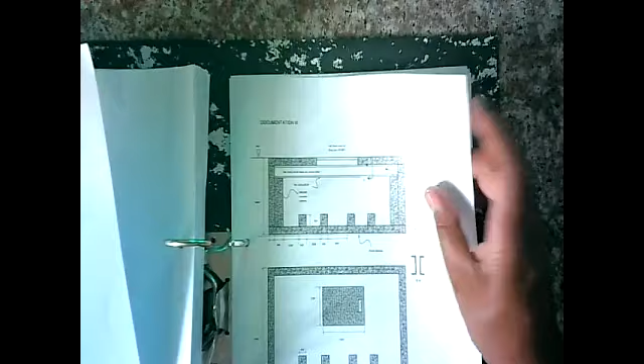All right, page 63, and we're looking at the next question, question 3. And we've got here: the drawing below shows the details of the submerged reinforced concrete pump station. All right, now this particular question was, I suspect, a past year test question. So good practice for you guys for a test. All right, so let's look at question 4.

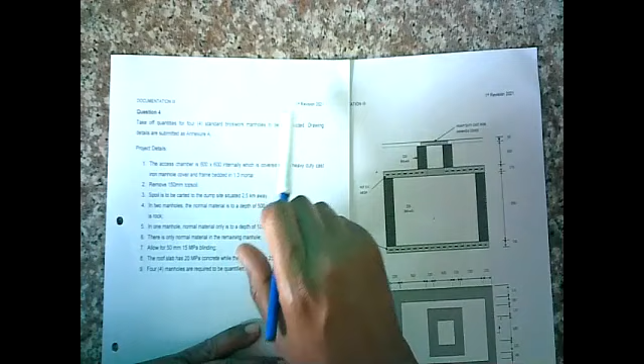Question 4 on page 65. And let's get the drawing out. So question 4 on page 65 and 66 asks you to take off quantities for 4 standard brickwork manholes to be constructed. Drawing details are submitted as Annexure A, and here's Annexure A. Project details: the access chamber is 600 by 600 internally, which is covered by a heavy-duty cast iron manhole cover and frame bedded in 1:3 mortar.

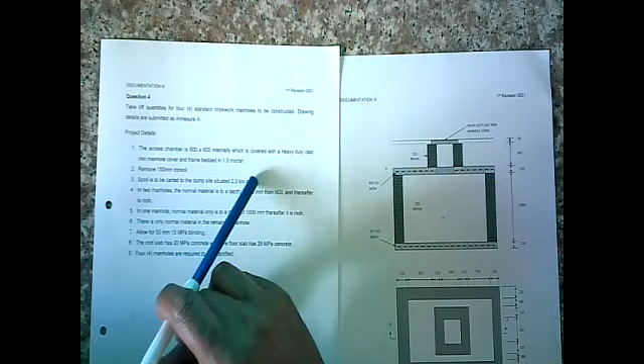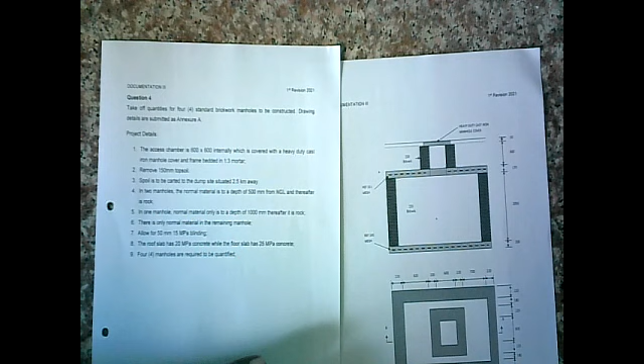All right, remove the topsoil. We know what to do with that. Spoil is to be carted to a dump site situated 2.5 kilometers away. We know how to handle that. All right. 2 manholes: the normal material is to a depth of 500 millimeters from natural ground level, and thereafter it is rock. In 1 manhole, normal material is to a depth of 1 meter, thereafter it is rock. And there is only normal material in the remaining manhole.

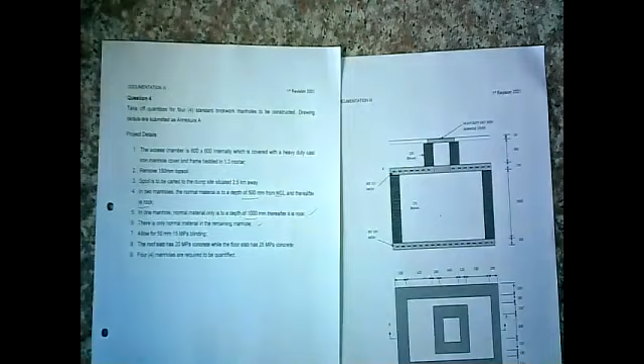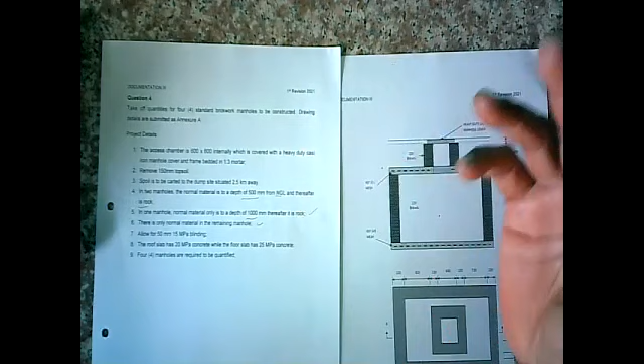Oh crap, now what? Multiple conditions. And I chose this particular question because coming off the last one, a lot of students may still be a little bit shaky on the concept of extra over. And this particular question should give you a better idea. Also, we have 4 items. The first thing that should come to your mind: the factor column. All right.

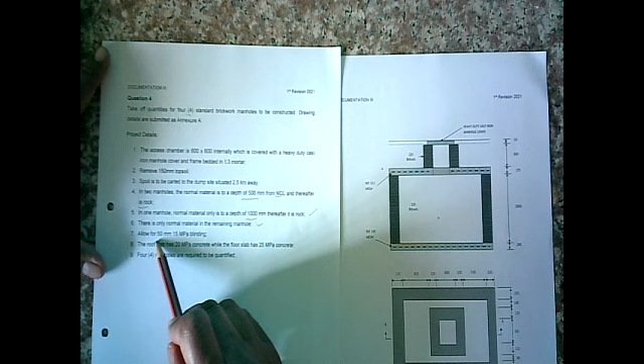Allow for 50 millimeter, 15 MPa blinding. A roof slab is 20 MPa concrete, while the floor slab is 25 MPa. Now, coming after the last one, 3 different strengths, so we know what to do there in terms of the line items for the bill of quantities. And 9 wasn't really necessary, but I had to put it in there because somebody would get confused. I'm saying 4 manholes are to be quantified, not 1. And if you counted the conditions, 1, 2, 3, 4. 4 manholes, different conditions.

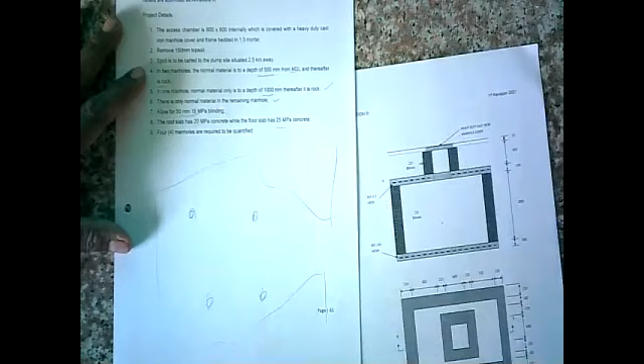Think of it as something like this. You've got a housing development with a road, and you've got a manhole here, a manhole here, a manhole here. And what happened was the soil conditions are different there as to there, as to there. That's why. Got a housing development and 4 different manholes, because the soil conditions differ in that particular project.

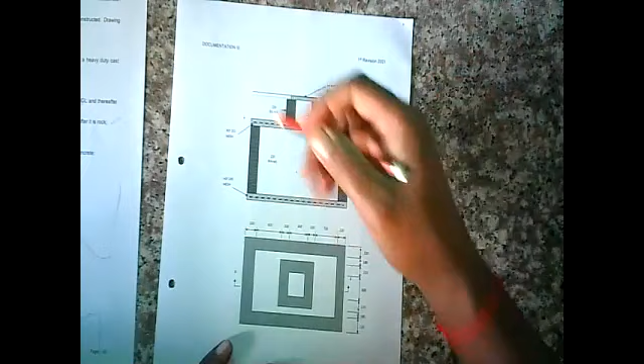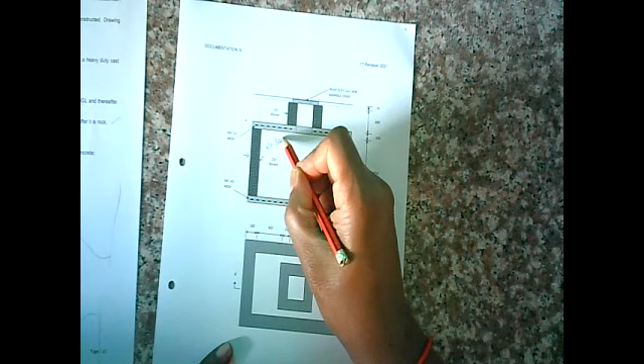Okay, so let's look at the drawing. Compared to the last one, if you recall, we had concrete. Now I'm giving you brickwork. So I'm drawing in some of your knowledge of estimation already, if you haven't realized that. Okay, what am I asking for here? If you quantify, I want to know number of bricks, and if I know the area and the thickness of the brickwork, then I can also quantify meter cube of dagga, or sorry, the word I'm looking for is mortar. So you can quantify mortar.

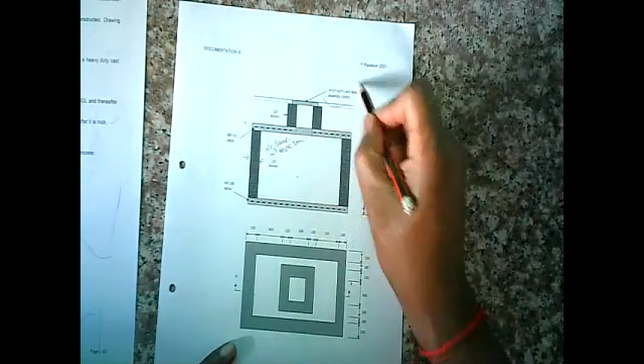So also one more thing. Heavy duty cast iron manhole cover. Believe it or not, that's also part of the quantities. I'll show you how to handle that in your bill of quantities. All right, so let's look at this.

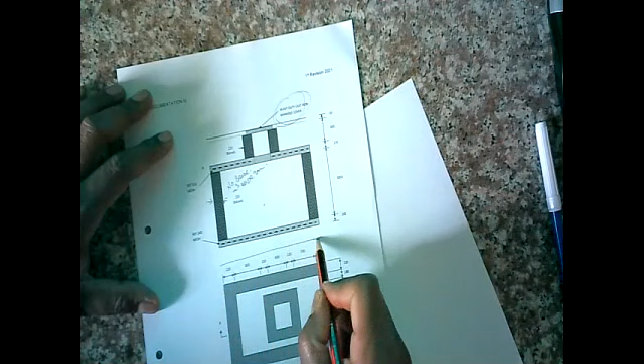Right, let's see what we call this. First and foremost, let's put the page, 65. Right, one. Right, what is this? There to there, 3020, and from there to there. Check this out, please. 1840. All right.

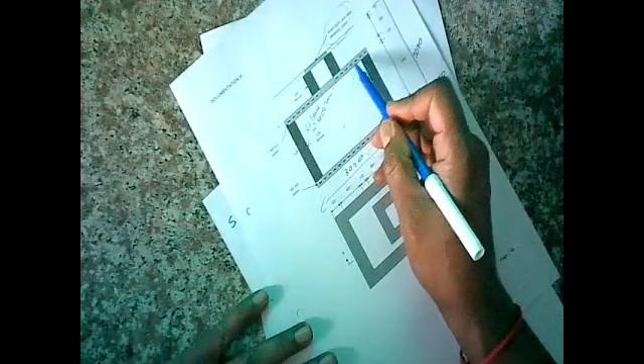But if you go to the sketch, what do you see? See little dashes there and reference 311 and reference 245. What am I talking about? I'm talking about the thickness of the reinforcing mesh that we're using for reinforcing instead of reinforcement bars. Okay, if you go back and read your notes, you'll see for floor slabs we're using mesh. Okay, now mesh is an area, right? That is why you don't see a weight.

Okay, so let's see how we handle that. All right, for 245, let's put here reference 245. Now, reference 245 is sitting on the floor. All right, so we need it for the full area of the floor, and we know what the area is, 5.56 meters squared. No calculations, it's already done.

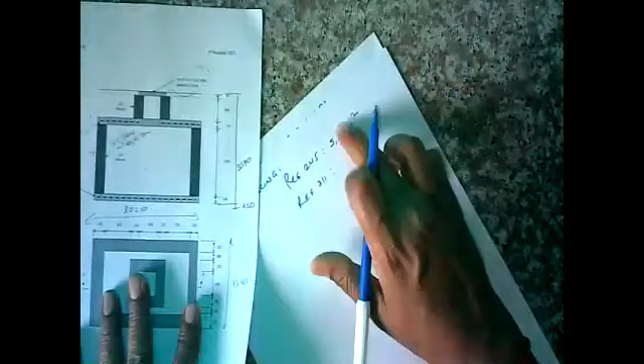Okay, but reference 311 is now sitting in the roof, but there's a hole there. So we subtract the area of the hole, which will probably give us 5.56 minus 0.36, and we're looking at what? 5.2 meters squared. So that handles reinforcing. Now let's look at something else.

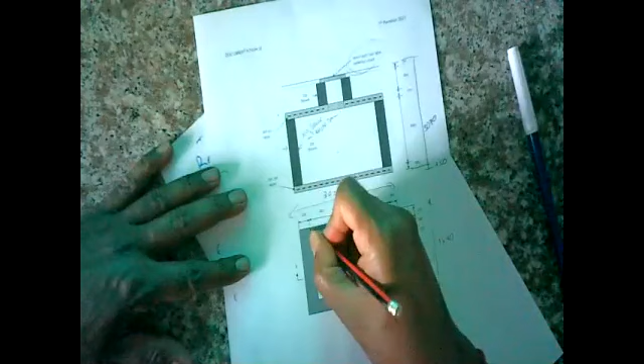Let's look at brickwork. Okay, we put the floor on, we put the reinforcing. Now we're gonna put the brickwork of the walls, and let's get some quantities there. Notice also again, if I were to break this up, there, and there, I'm getting panel A equal to A, B equal to B. All right, and that's shortened. We're using the full length. You know what that is all about from the last concrete reservoir example.

All right, so let's do times 2, plus 2 times, minus 2 times 0.22, and we should get something like 6.04 plus 2.8, and we're getting 8.84. All right, what is that? That would be the perimeter of this entire thing. All right, what is the height? Times the height of 2.05, and we get what? 18.12 meters squared. 18.12 meters squared of all that brickwork.

And if you know the area, drawing on your knowledge from estimation, at 108 bricks, because it's a single brick wall, we can get the number of bricks, 1957.176 bricks. All right, please don't round off at this stage. You'll see why. Remember, this is a calculation for one. If you round this off to the next, you're actually increasing the quantities for bricks unnecessarily. So don't round off at this stage.

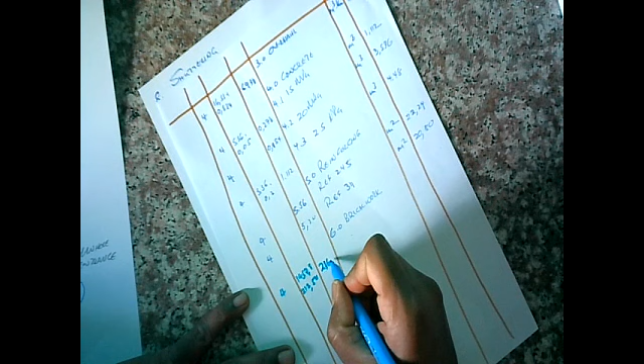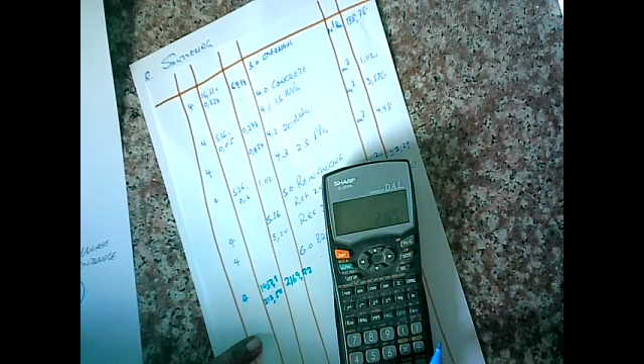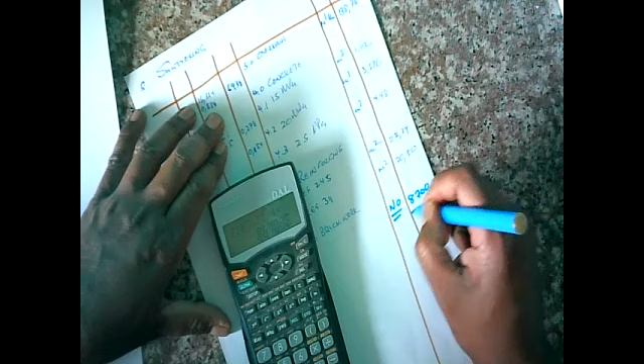Number of bricks. All right. And if you do this math, 2169.72 times 4. We're getting 8670. So let's buy it to the next 100. And let's say we're buying 8,700 bricks. Okay. And that was brickwork.

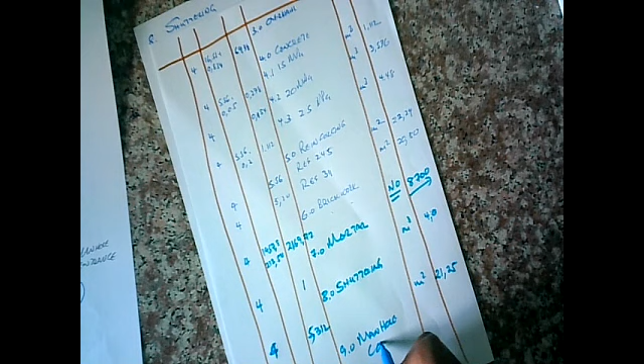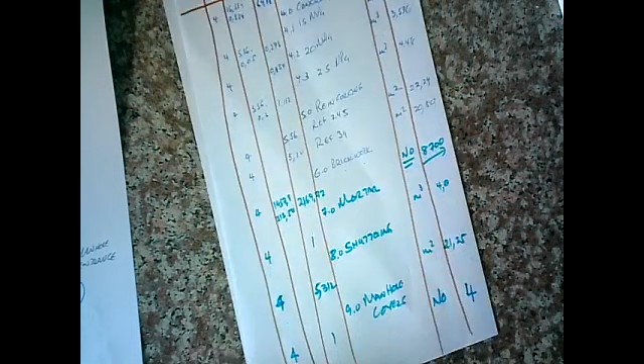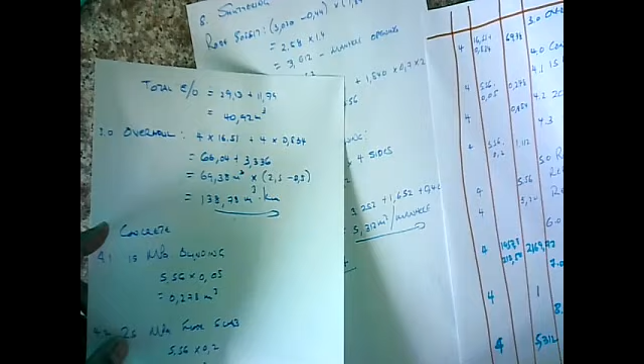All right, so basically that's how we quantify and put into our bill of quantities. Now, as you can see from this particular question, I tried to bring in different items, simple to a little bit complex. So we've got conditions here that we have to take into consideration, and then we've got something different in terms of reinforcing. We didn't have kg per meter cube, we had an area, so that's new.

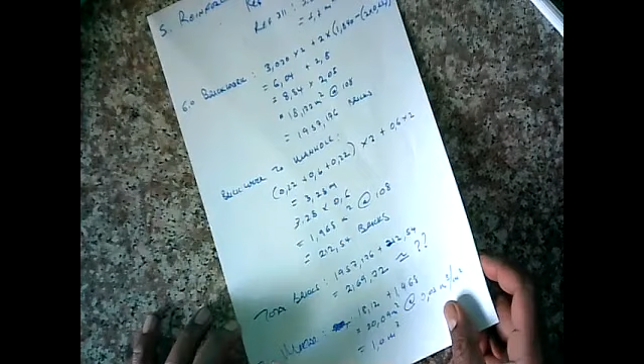How did I bring brickwork and mortar into this calculation? There we go, we found a number of bricks, and I didn't round up here, I actually rounded up here, to get a more accurate count. And then from the bricks, we knew how to calculate mortar based on our estimation knowledge. And shuttering, you need to figure this out or do it your own way, the way you interpret it, you'll probably still come to these answers, or that final answer. And lastly, something with no calculation involved, but we still need to buy it or put it into the structure when we're finished.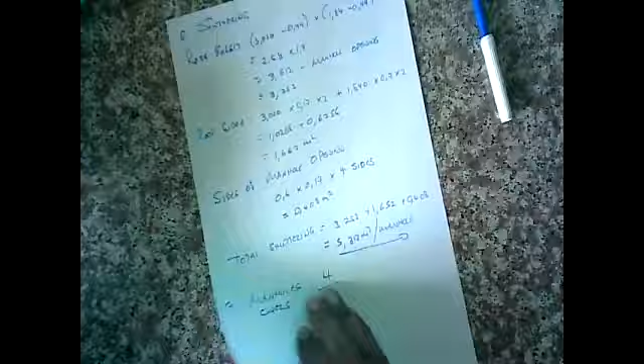Okay, now you'll experience something like this with windows. If I give you a structure with windows, then you have to put in windows, a code, ND4, ND12, ND1, how many of them. All right, and this usually carries about 1 mark each in your bill of quantities. So marks for nothing there. All right, so that brings us to the end of this particular question.